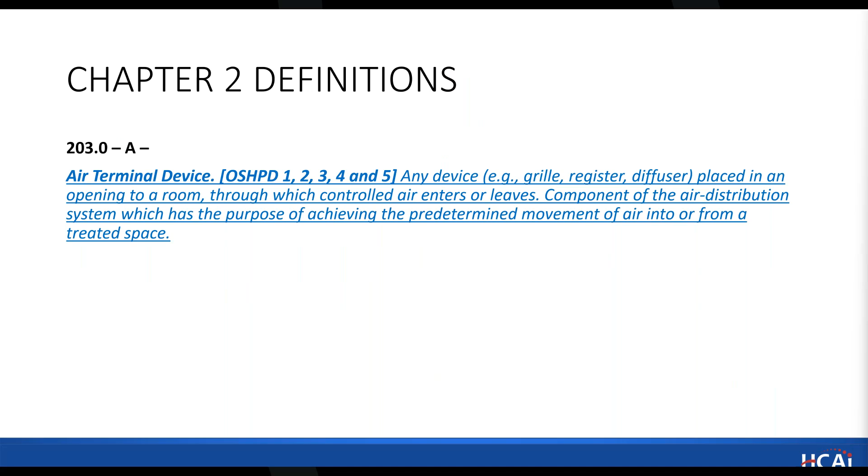Next up, moving to Chapter 3, under 321 for essential mechanical provisions. Our new section here is provided for 321.3, and it's for cooling equipment necessary to maintain temperature and humidity for one operating room and other spaces as identified in the functional program. This code section was coordinated with CDPH as we were evaluating NPC 5 requirements and emergency planning.

There's also a minor change to 321.6 for all control components. We also want to specify this is for fire and smoke dampers, as those normally shut down on loss of normal power. We need to keep those energized to keep the system operating during loss of normal power.

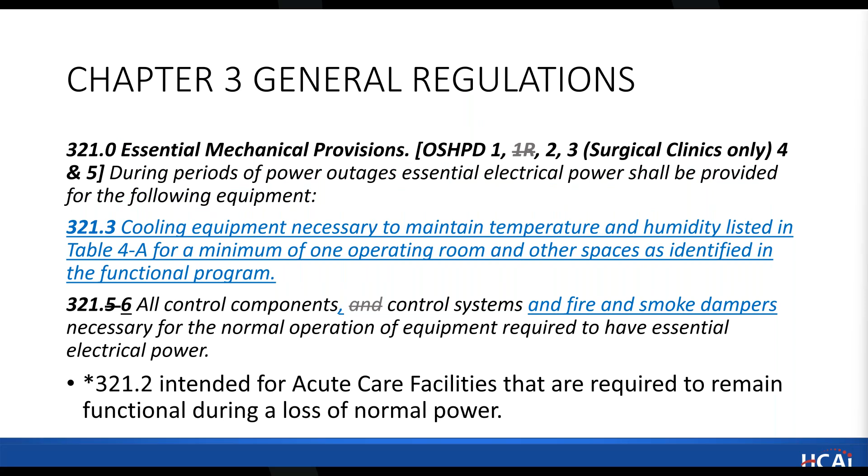Next up in Chapter 3, we have 322, sensitive areas or rooms. This list was updated to bring in some similar room types from 1224 for operating type rooms. The list was reorganized, and then also procedure room class 2 imaging was added.

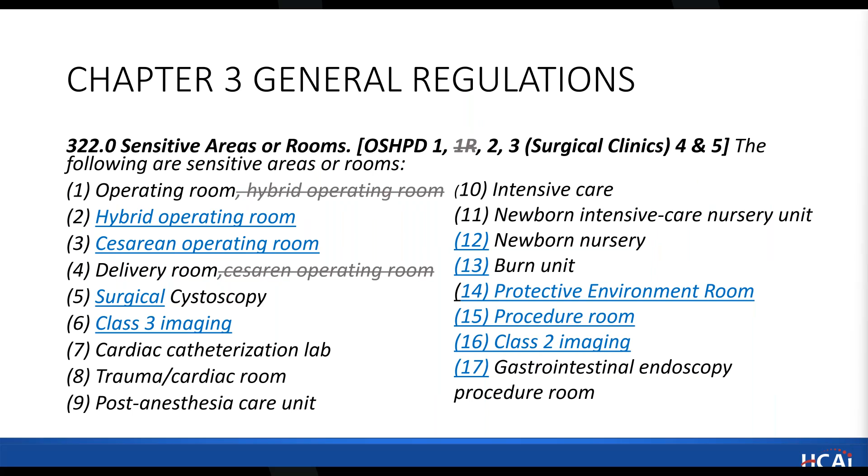Moving on to Chapter 4 for ventilation air. The OSHPD amendment for Table 4A was relocated from 402.1.2 to 402.1. OSHPD's trying to make sure that our amendments are in the middle of the model code, so there's a new paragraph there, and then the additional requirements for using ASHRAE 62.1 for non-Table 4A spaces were coordinated with this amendment.

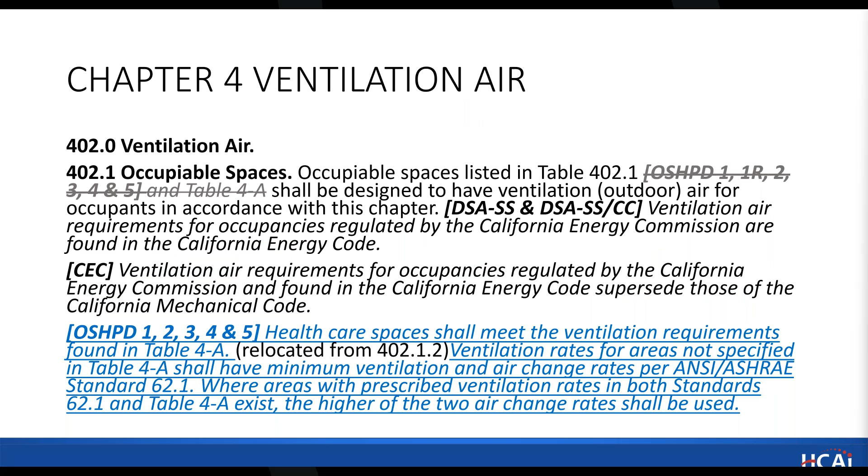So the next section here, 402.1.2, the Uniform Mechanical Code adopted the 2021 edition of ASHRAE 170. In the previous code cycles, the 2013 edition of ASHRAE 170 was adopted. So we're revising our amendments to coordinate with the 2021 edition. So the language in this paragraph was moved up to 402.1.

And some of the amendments following this were coordinated between the OSHPD Chapter 4 requirements and ASHRAE 170. The following line at the end was to note that where requirements of this code conflict with ASHRAE 170, the most restrictive requirement shall prevail. Some OSHPD requirements are a little bit different than ASHRAE requirements, so both standards need to be utilized together.

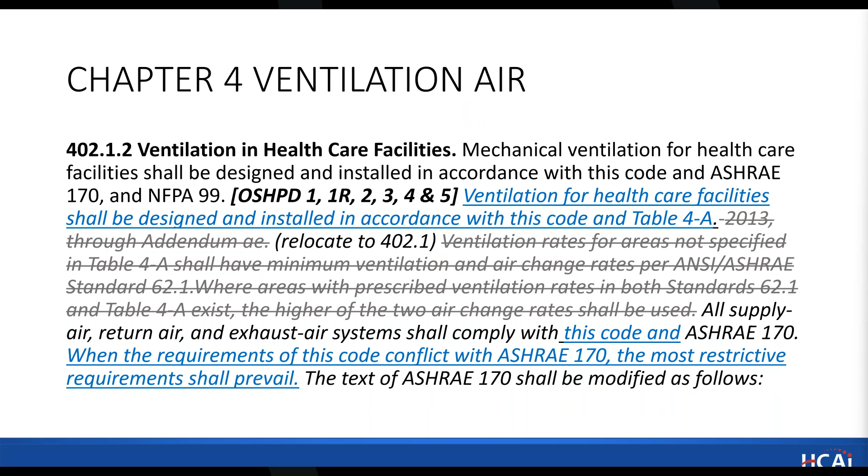Following on with the same section, some of the amendments to modify ASHRAE 170 adoption were changed. So the thing here was, instead of noting not adopting the specific ASHRAE 170 section, to provide a pointer to the OSHPD amendment in the section number to make it easier to compare the two. Also, similar to before, the ventilation tables are referenced with Table 4A in the California Mechanical Code.

Continuing on with some of these modifications in the same section, some of the items pertaining to airborne infection isolation and protected environment were noted. And then again, some additional references to the ventilation tables in Chapter 7, 8, 9 have been replaced with a reference to Table 4A.

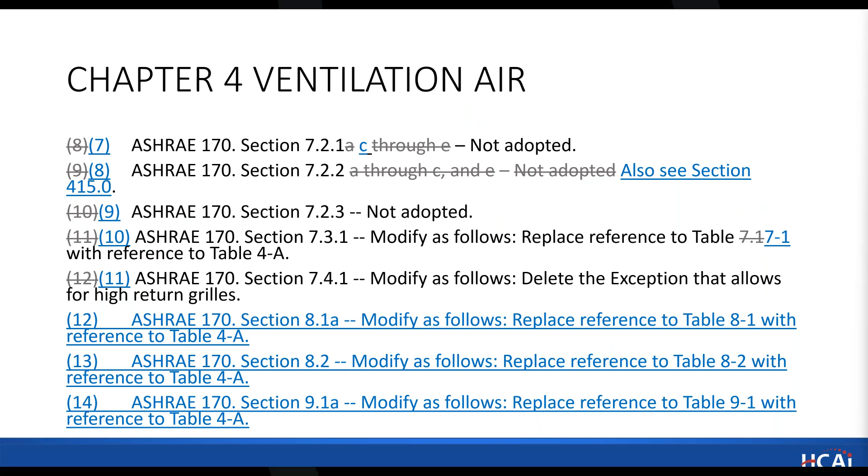Moving on to Section 406. This section just had a strike through, and just to point out, the provisions of the code that are removed have a gray font and a strike through here. The new changes are underlined with blue. So in this section, just the food preparation area was being removed from the section. Food preparation is included in Table 4A, and this is to coordinate with some of the filtration requirements in the national standard.

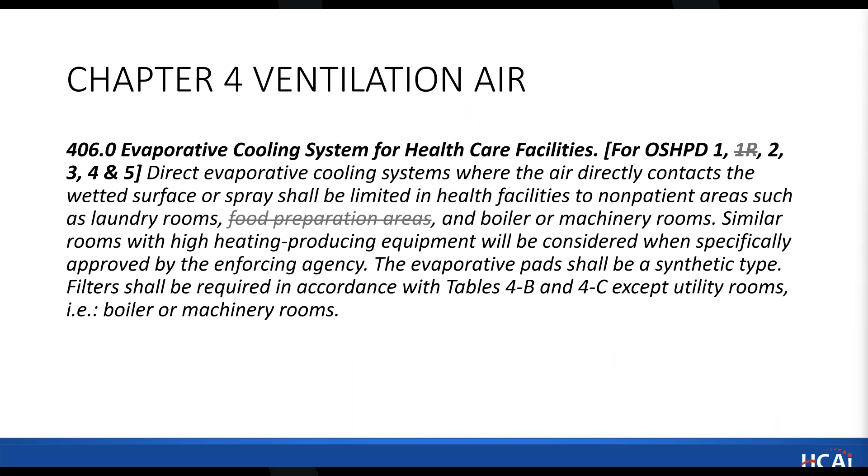Moving on to Section 407.1, the exception 2 provided all the unoccupied turndown requirements. Rather than have a long section with multiple requirements inside of the exception, these were moved to Section 407.7. So the new pointer here for the unoccupied turndown will point to 407.7.

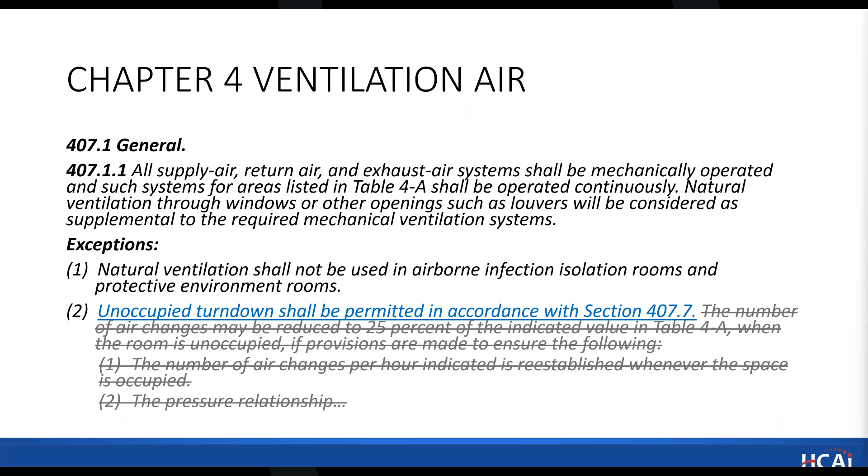So moving on to 407.2.2, the new section 407.2.2.1 is added to bring in the requirement for exhaust height discharge for specific spaces of infection control. And this is in accordance with the national standard. It'll have height and the distances from outdoor intakes and building openings. And these are the hazardous exhaust areas, including airborne infection, bronchoscopy, compounding, morgues, and similar type spaces.

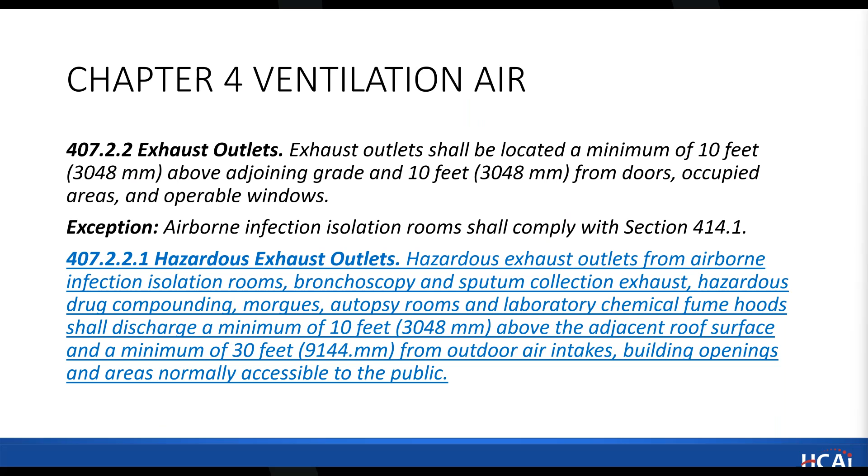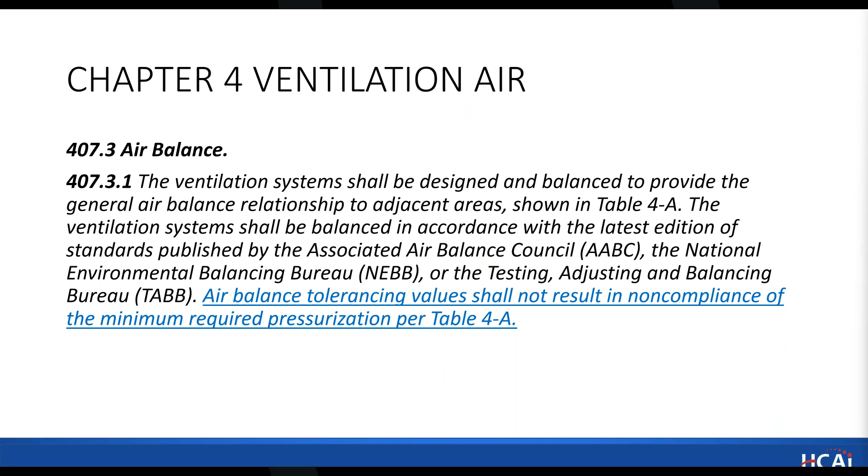Moving on to 407.3, air balance. A new sentence was added at the end to clarify airflow values must still provide the minimum required pressurization when balancing. Some air balance tolerances can be as high as 10%. For the airflow value within 10% and meeting the approved plans, the required pressure differentials must also be maintained. It's just to clarify that.

Moving on to Chapter 4, ventilation. We did a little bit of reorganizing with this section. Requirements from 420, which also dealt with air distribution devices, were brought into the section. 407.4.1.3, the new section, will take the 407.4.1.1 amendment, and we're going to split that up into multiple sections that deal with each requirement. And then in the reorganization, 407.4.1.2 is brought over from 407.4.1.6. So just a little bit better flow to get the general requirements, followed by the more room type specific requirements.

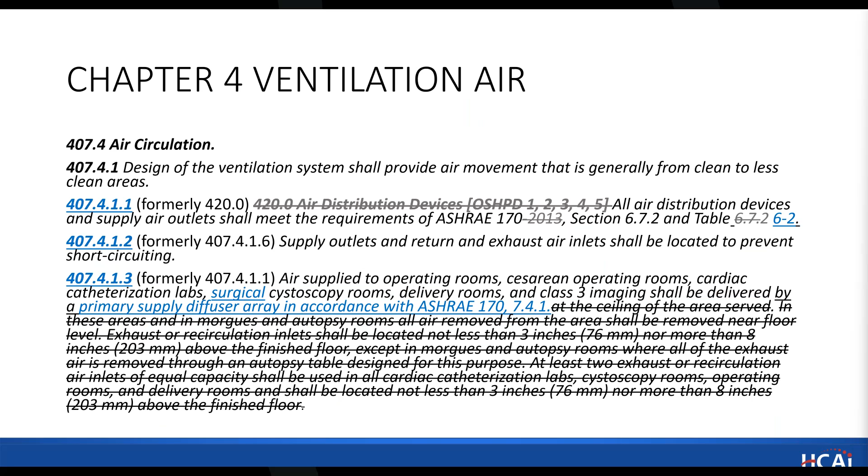So following that, 407.4.1.4 is a new section to provide directional airflow for Class 2 imaging and procedure rooms from clean to less clean. 407.4.1.5 will locate the return and exhaust inlet requirements for operating room type spaces. 407.4.1.6 will split out separately the morgue and autopsy occupancy requirements. So this just makes it read a little bit better so we can read one section for each specific requirement. And then 407.4.1.7 is the relocated 407.4.1.2 for position of low inlets.

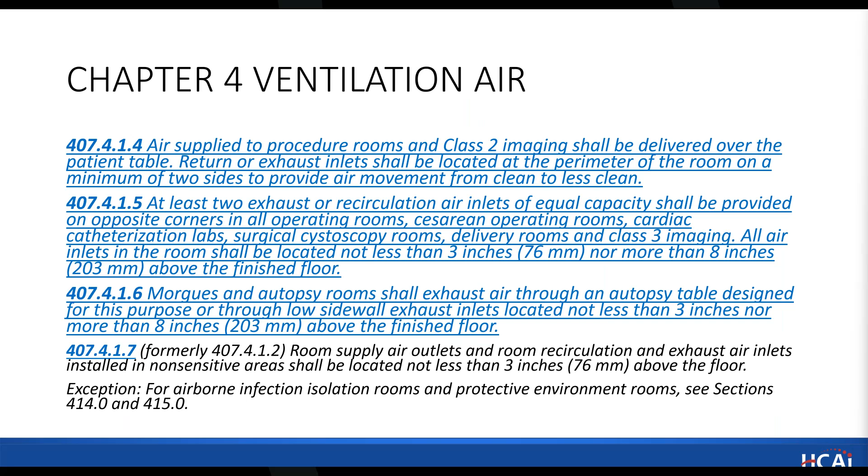With those changes, the corridor and the next sections were revised section numbers to 407.4.2, and the corridor requirement was revised to be more in line with the California Building Code. These OSHPD amendments went in place prior to the building code requirements for corridor airflows, and so this is being updated to match the multiple changes that have happened since then in the building code.

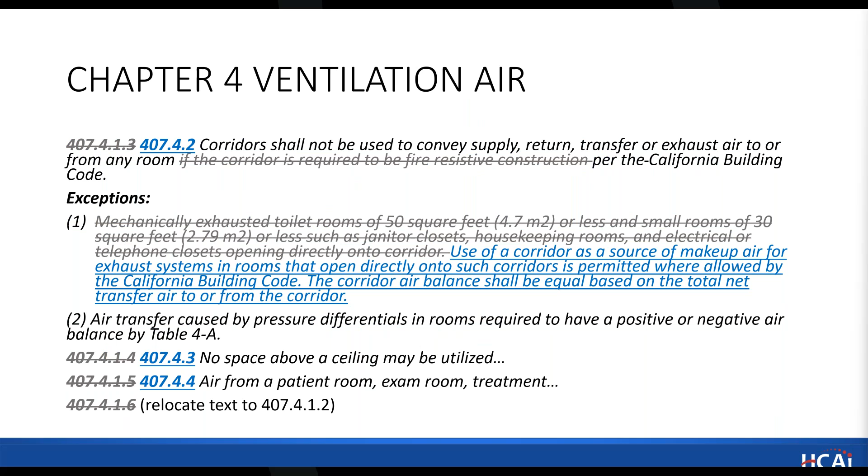Moving on to 407.4.5, this is renumbered from 407.4.1.7. This deals with what is now called recirculating room units. The charging statement's been revised, and item 3 is bringing in all the filter requirements rather than pointing to 408 and the multiple sections. Now all of the minimum MERV 8 filtration to match the national standards is provided for the specific room unit in this section, and that allows multiple other sections to be taken out of 408. So a little bit of a simplification here.

Number 4, specific for coils such as chilled beams. These systems need to be designed to have temperatures above the dew point and should include some sort of indication if that condition is not satisfied.

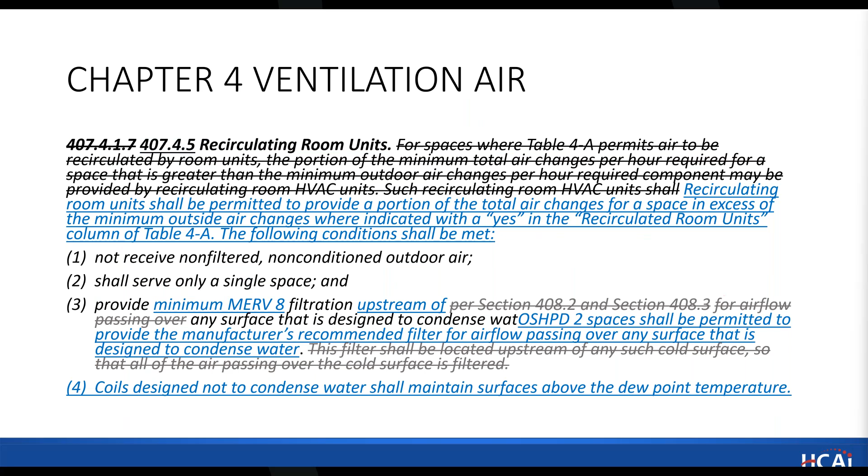So for 407.4.5.1, this section was added, bringing in the ASHRAE 170 requirement for recirculating room units, which only applies to spaces under ASHRAE 170 where OSHPD amendments apply to the building. So this section is necessary to handle non-Table 4A spaces, and they can just meet the 62.1 requirements, which we've outlined here, that the recirculating room unit may have filtration as recommended by the equipment manufacturer, and this will clarify spaces for IT rooms, mechanical spaces, or other non-Table 4A spaces.

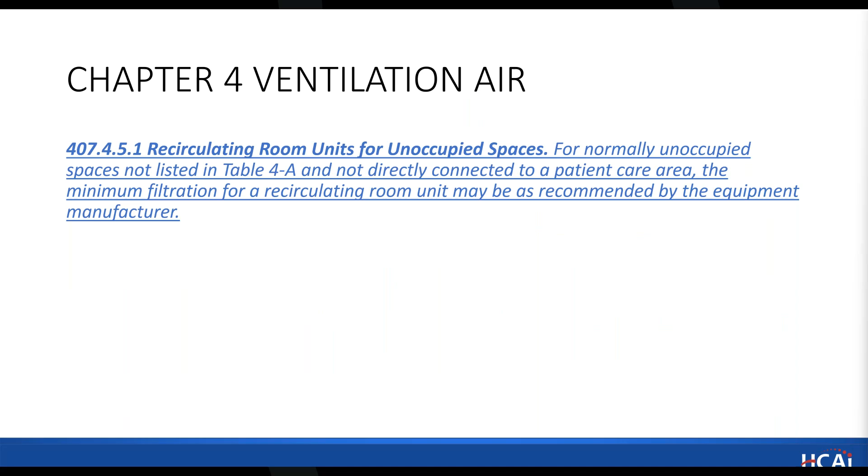Moving on, we had some changes to 407.5, and this is for variable air volume. 407.5.1.3 was revised for the purpose to maintain space pressurization. New section 407.5.1.4 was provided to complement the requirement in 407.5.1, since the spaces are not permitted to have VAV by the charging statement, and this is to help ensure that the return air to these spaces will maintain the air change rates and pressurization. Most of those spaces have pressure requirements, and the other sections will require supply and exhaust return control to maintain the space pressurization.

407.5.1.5 was added. National standards refer to ASHRAE 90.1 for return fan tracking. This provision is not included in Part 6, so some of the language that also takes into account space pressurization was added.

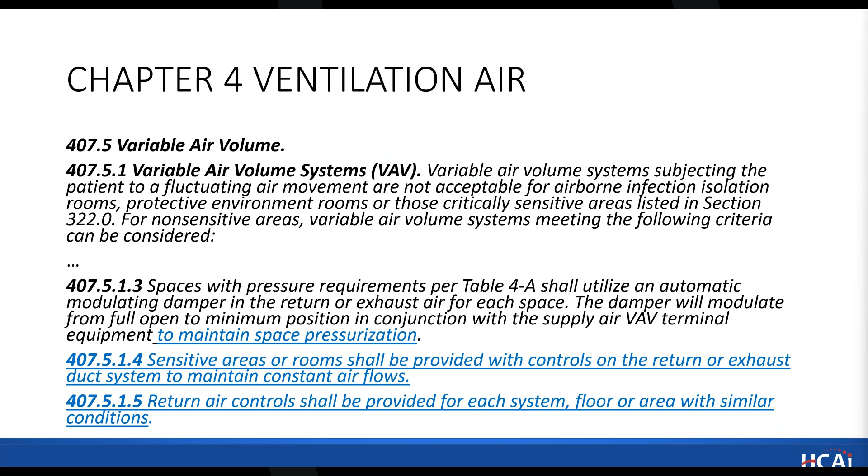So moving on to 407.7, this is the unoccupied turn down. So this was previously the exceptions in 407.1.1. We provided a charging statement and then 4 different criteria to split it out to make it easier to understand. So this is not a change or new requirement. This is the specific requirements in the existing paragraph, and just the section was revised in format.

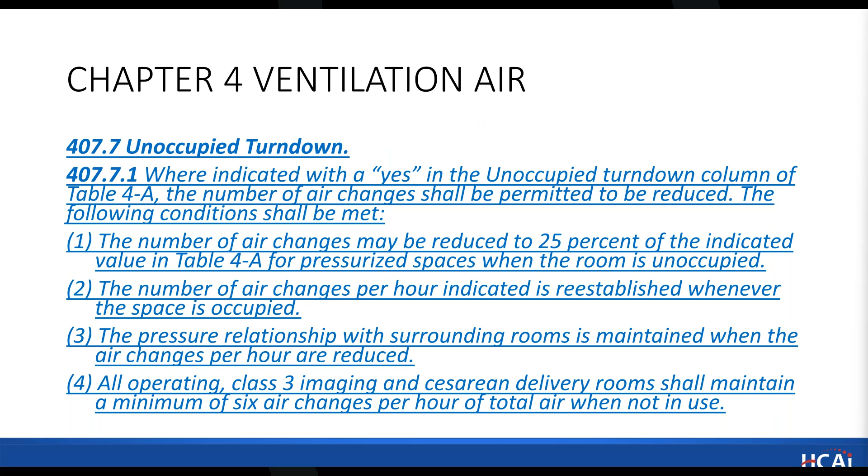407.8, building pressurization is a new section. This section is new to 2025 and brings in a requirement to prevent building infiltration, which is also in ASHRAE 170 2021 edition. And it also coordinates with section 407.5 and 407.7.

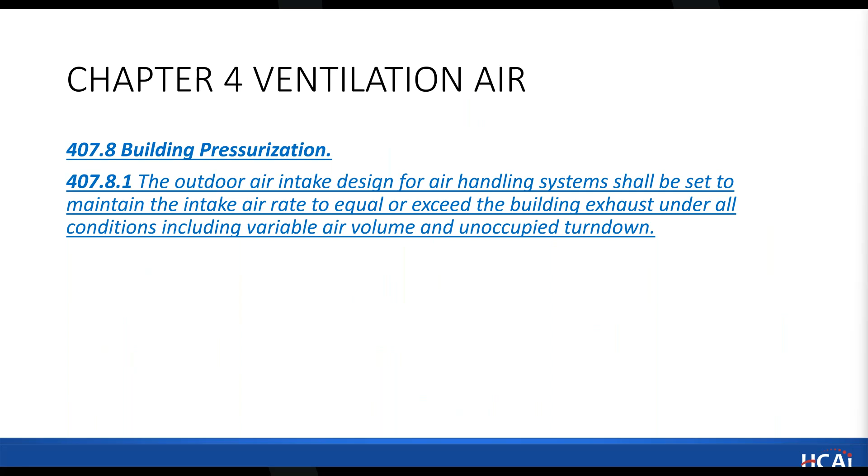Moving on, we're into section 408.1, which is for filtration. This section was revised to coordinate with requirements in ASHRAE 170 to provide HEPA filtration at the air terminal device. The air terminal device was also a new definition added previously in chapter 2. The previous organization of this chapter allowed a third filter bank at the air handler unit to do the HEPA filtration.

This section's been coordinated with the national standard requirements to provide that at the air terminal device of the room. So that'll be for operating rooms dealing with more sensitive critical surgeries and also protective environment rooms.

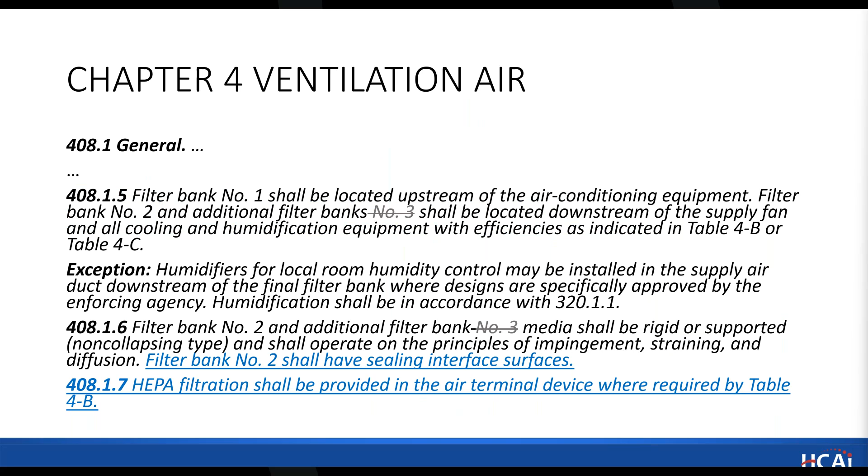408.2 is filters for hospitals. The 3 sections being removed were previously identified as non-central recirculating air handling systems, and these are now identified as recirculating room units and are addressed in 407.4.5. The filter requirements for this type of system is the same for all conditions. So whether or not the unit or the room function can use a recirculating room unit will be identified in Table 4A, and then we'll go to 407.4.5 for the requirements of the recirculating room unit.

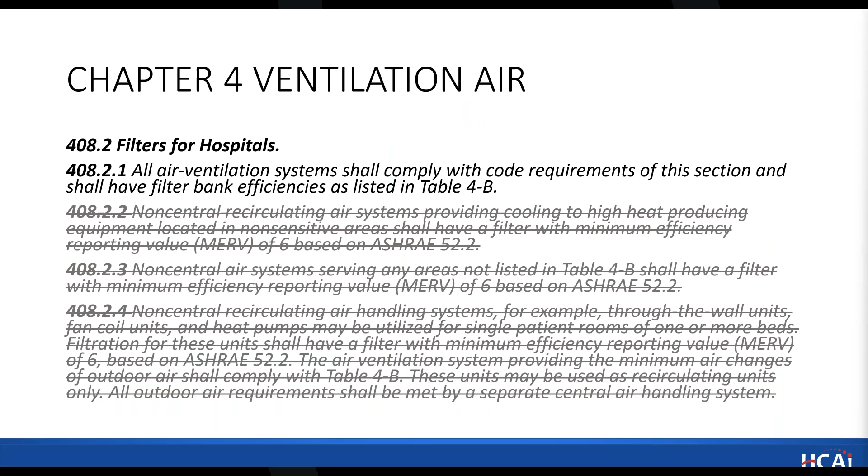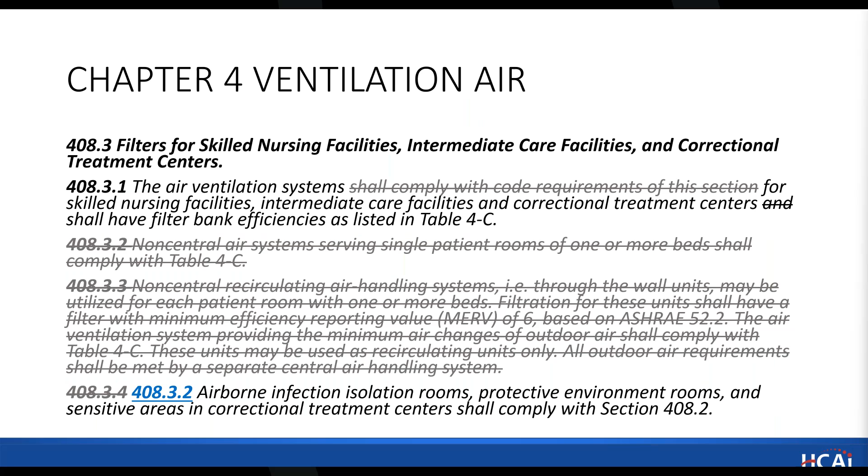Similar here, this is the SNF, skilled nursing facilities, intermediate care facilities, correctional treatment centers, filtration requirements. 408.3.2 and 408.3.3 were for the non-central recirculating air units, and this is taken care of by 407.4.5. 408.4 is the filters for outpatient facilities. Similar changes here.

And then 408.5 is just adding a pointer to also provide clarification that filters for recirculating room units will be provided per section 407.4.5. And also pointed out the note that where Table 4A does not permit recirculating by means of room units, as long as these units meet filtration per Table 4B, then they are permitted.

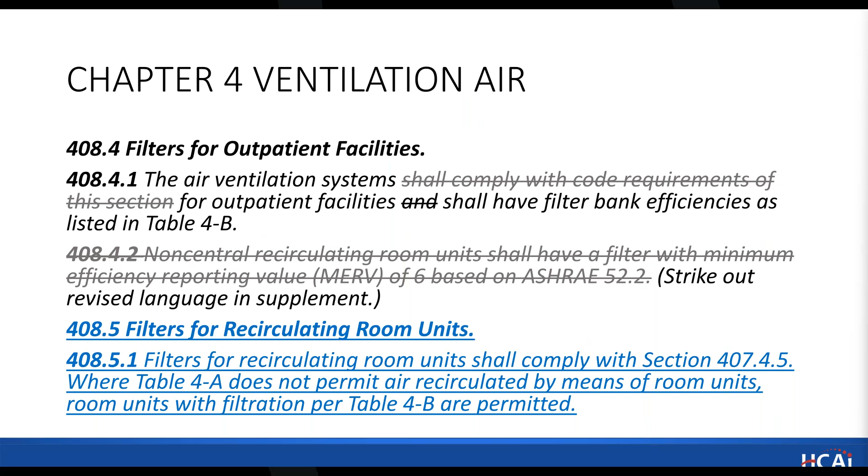Moving on to section 409, 409.3 is for insulation of ducts, was stricken in this code cycle. This is a duplicate amendment down in chapter 6, so 409.3 is removed, but it's not removed from the code. The chapter 6 amendment is still applicable, and this is a duct requirement, so it's more properly in chapter 6.

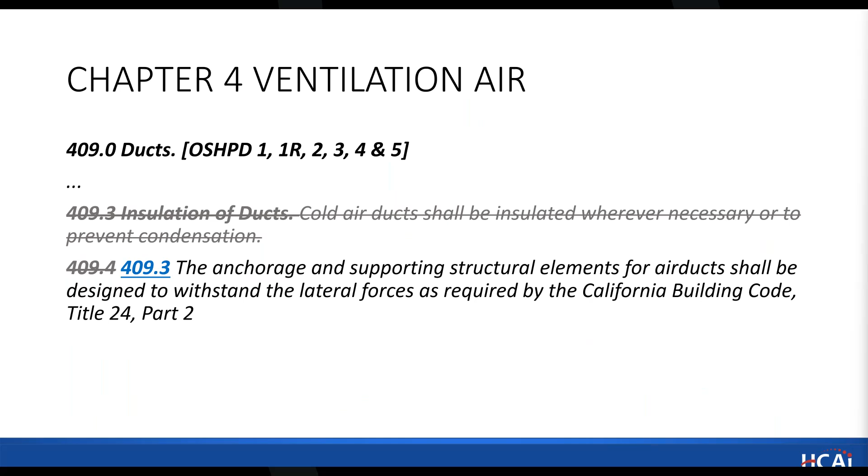Moving on to section 414 for airborne infection isolation rooms. 414.1.1, previously the height was 7 feet. National standard requires 10 feet, so we've updated the requirement to match the 2021 edition of ASHRAE 170.

And then 417.0 is the testing and balancing for those rooms. The last sentence is just to note that the air balance testing shall include a pressure test at the doors serving the isolation and protected environment rooms to provide the directional pressure relationships in section 416.1. And that's essentially to meet the alarm requirements that's being checked and tested.

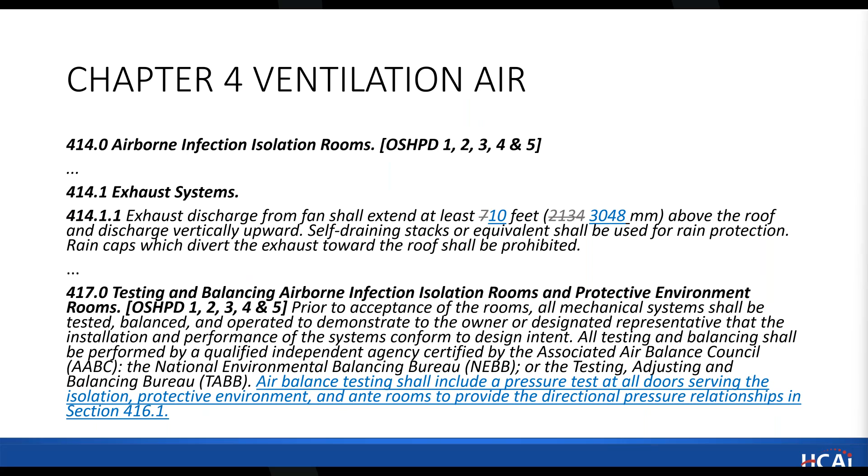Now moving on, so Table 4A, we show it stricken here, so we still have Table 4A. The existing Table 4A was... so rather than provide all the changes, there were multiple changes between the 2013 and 2021 editions. So rather than trying to incorporate all those changes, we started with a base.

Your audio cut out for just a second. Okay, thank you. So

Moving on next, the Table 4A here is shown. So as the table's shown in the code, this one's a little bit different. All the normal straight font is actually the ASHRAE 170 table items. All underlined and italicized font are OSHPD amendments to the table, and most of these amendments are brought from the previous code cycle. Typically how the code cycle works is all amendments previously in the mechanical code are brought forward with changes as needed. So we will go over the notable changes to be discussed today.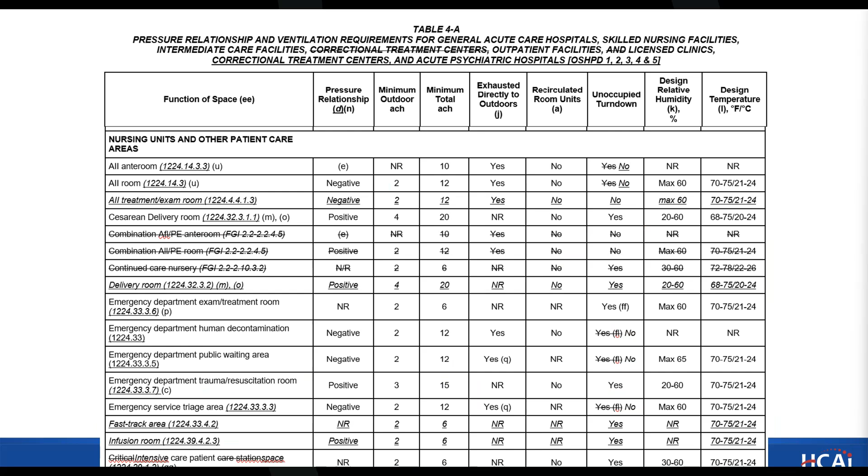So this is continuing with Table 4A. We'll have multiple slides here to show. This again shows either revised terminology to match 1224 and then existing OSHPD amendments from the previous Table 4A brought into the table or underlined.

Also, I want to point out at the top of the table, Table 4A, we added the OSHPD banner, the OSHPD 1, 2, 3, 4, and 5. That previously wasn't in the table. It's supposed to identify all OSHPD amendments. The title was reorganized to match the 1, 2, 3, 4, and 5 designation order. So that's why you see the change with correctional treatment centers and acute psychiatric.

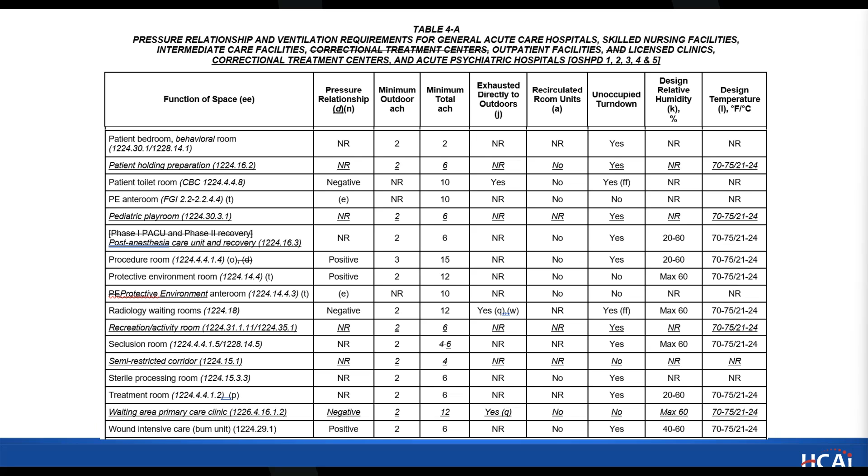We're still in nursing space. This is previous OSHPD amendments brought forward and room functions coordinated with the CBC terminology. And this section of Table 4A starts with diagnostic and treatment areas and follows the ASHRAE 170 format.

For the Class 1, 2, and 3 imaging room that was brought into the California Building Code the previous intervening cycle, some of the rooms based on CBC location and terminology were placed under the Class 1, 2, or 3 imaging. These spaces could be a higher terminology. Those procedures list is required whenever there's a Class 1, 2, or 3 imaging, and CDPH confirms the correct class. So a CT scan, if it was doing a Class 2 imaging, could have a higher ventilation and mechanical requirement based on the procedures.

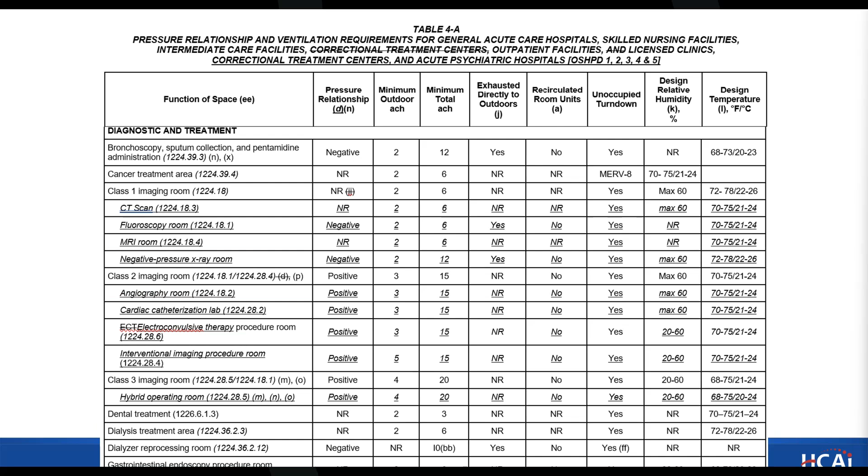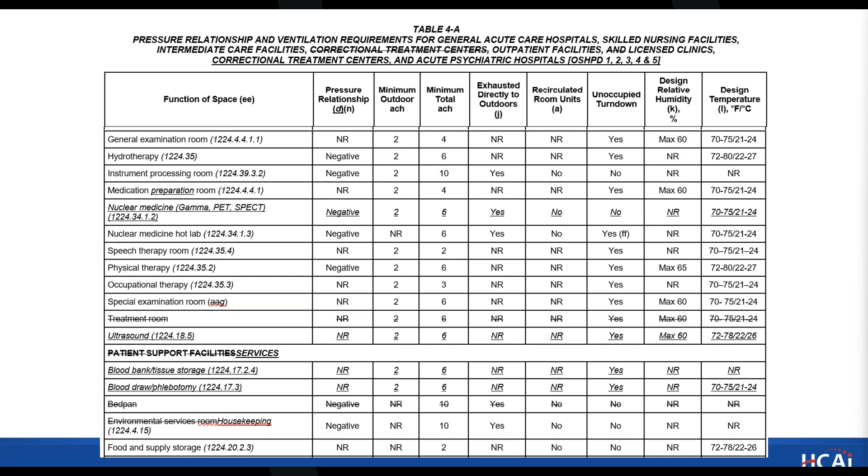And there is a printing error there for cancer treatment on the FAT, but that was fixed in proof phase, so the printed version will be corrected. This section continues with diagnostic and treatment spaces, and then it's followed by support spaces. Again, the terminology for these is shown as revised to more match the OSHPD amendments in sections 1224, 25, 26, and others in the California Building Code. Similarly, environmental services room is changed to housekeeping to match 1224.4.15 of the Building Code.

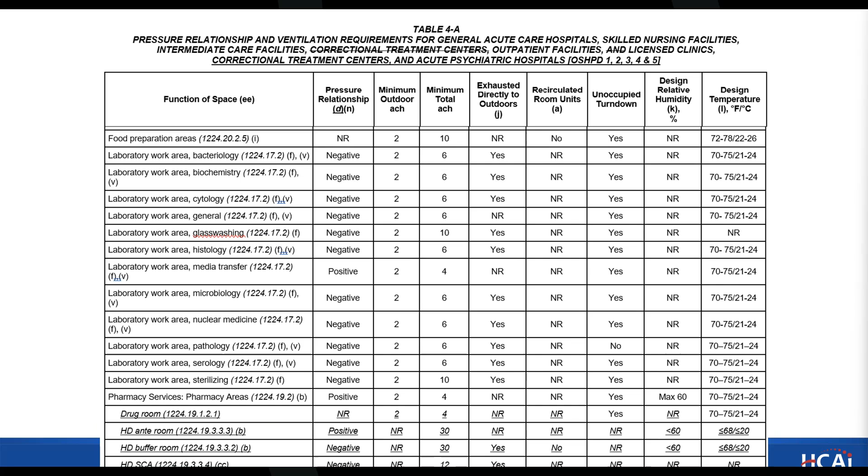We continue with more support spaces with the OSHPD amendments for pharmacy compounding added in there and brought forward to the table. Those are based on the USP requirements. Continuing with pharmacy compounding, there was one change to the non-HD anteroom air change rate. It was revised from 30 down to 20, and this is to match USP 797. An anteroom for non-HD is only required to be ISO 8, but if it does serve both a non-HD and an HD room, the HD anteroom requirements are more restrictive, required to be ISO 7, and still maintain the 30 air changes per hour required.

This table continues with a support service space for sterile processing. So we get our sterile processing ventilation requirements in one section, and then it's followed up by other general support services. The table continues with support areas for nursing units, and then is followed by the skilled nursing and intermediate care. So the OSHPD 2 type facilities will have a distinct section for those room types, including the resident type rooms. This slide continues with skilled nursing for service and support spaces for skilled nursing and intermediate care.

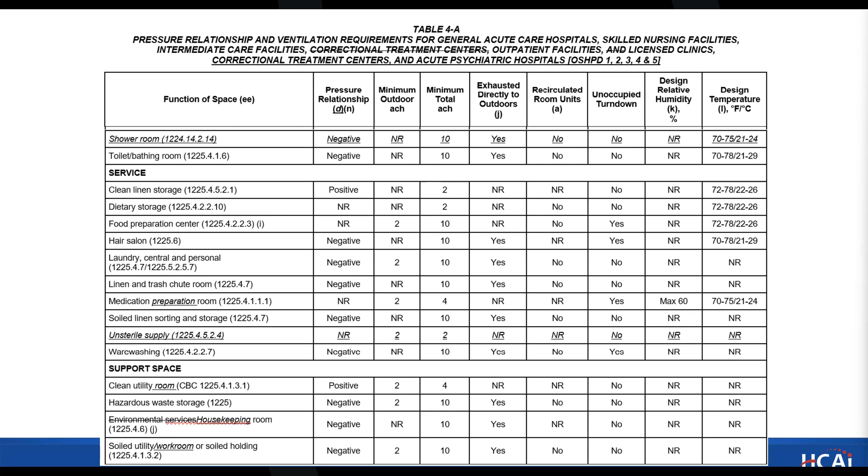So for the CMC Table 4A, the footnotes for the ventilation tables. We adopt ASHRAE Table 7.1 footnotes mostly and provided some amendments. The existing amendments that didn't have any changes are brought forward and not shown, but those are still provided in the table. We just address some of the changes that we did to the footnotes. So in footnote E, rather than reference the ASHRAE 170 sections, those have been replaced with mechanical code sections. Footnote G was just a relocation from a previous note AA to take up a not used space.

Note I was providing, since the mechanical code has commercial cooking areas, a pointer to Chapter 5 and the Section 511.3 requirements.

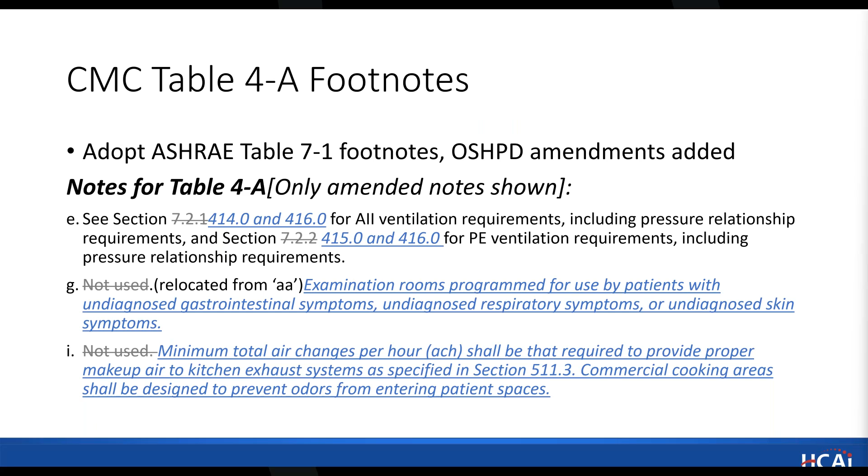So footnote J was revised to match with terminology in the CMC and as the tables are set up, and footnote EE here was revised to match with the terminology of the California Building Code, chapter 12, rather than the FGI callouts from the ASHRAE standard.

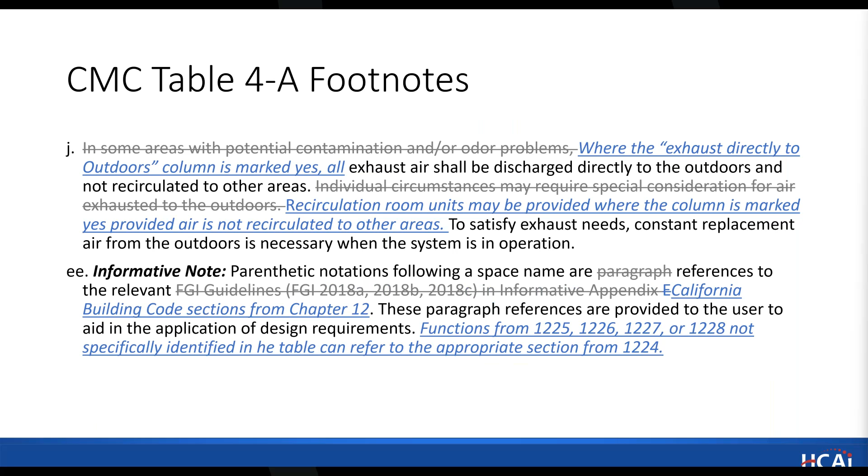Moving on to table 4B, starting off, so the OSHPD banner was also added to this table to identify the OSHPD categories or designations that it's for. And then similarly, the title was reorganized to match the order of 1, 3, and 5 designations.

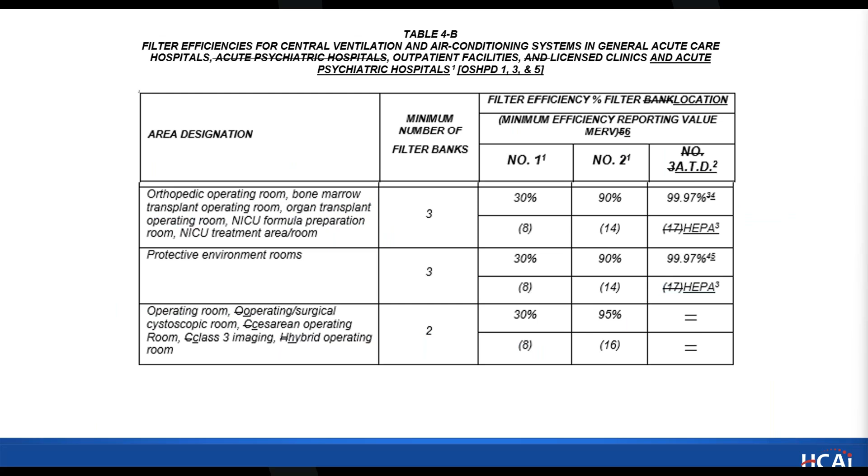Table 4B, we did have some updates for the 170-2021 edition of ASHRAE. And this is when the HEPA filter is required, it's in the air terminal device of the room served. So the orthopedic, bone marrow, organ transplant type operating rooms, when they require HEPA filtration, it'll be now at the ATD, which is designated as the air terminal device, rather than filter bank number 3. We also removed the MERV 17 as the MERV 17 doesn't quite meet the HEPA requirements, and HEPA is what is called out from the national standard.

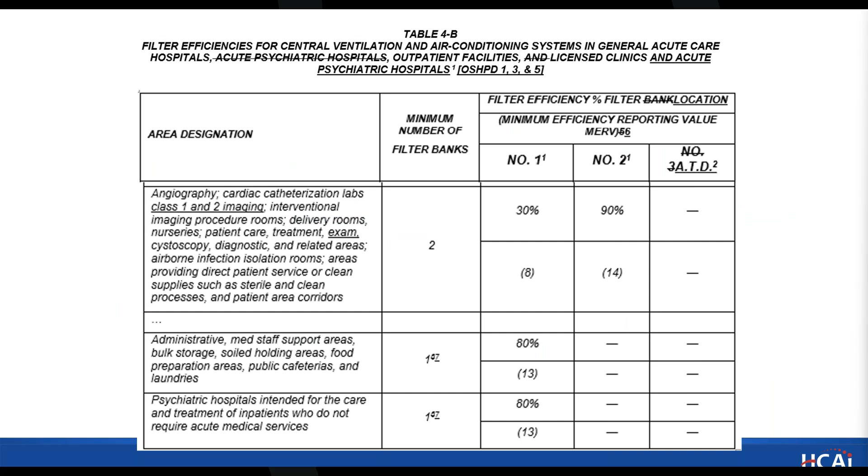Continuing with the table 4B, class 1 and 2 imaging and exam were added to the list for patient care areas. And then the footnotes were updated to match some of the requirements. So footnote 2 was repurposed to identify the acronym for the ATD, the air terminal device. Footnote 3 added the HEPA filter requirement found in 170, which is going to meet the IEST-RP test method.

Footnote 4 was revised to note the location for the air terminal device of the room served. And number 5 was bringing in the HEPA filter requirement for the air terminal device of protective environment rooms. However, it does provide a pointer to one of the exceptions in ASHRAE 170, section 7.2.2C.

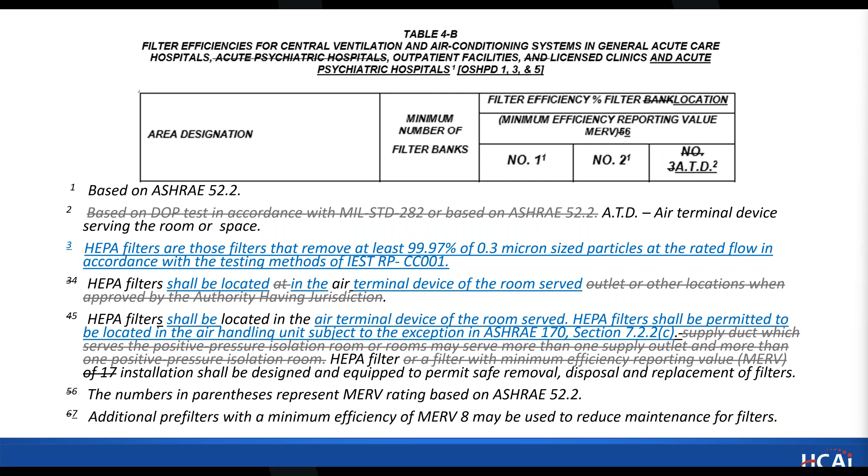Moving on to table 4C, the OSHPD banner was also added to this table for OSHPD 2 and 4. And footnote 2 was revised to coordinate with section 406 requirement and the national standard requirement for the minimum filtration for food prep area.

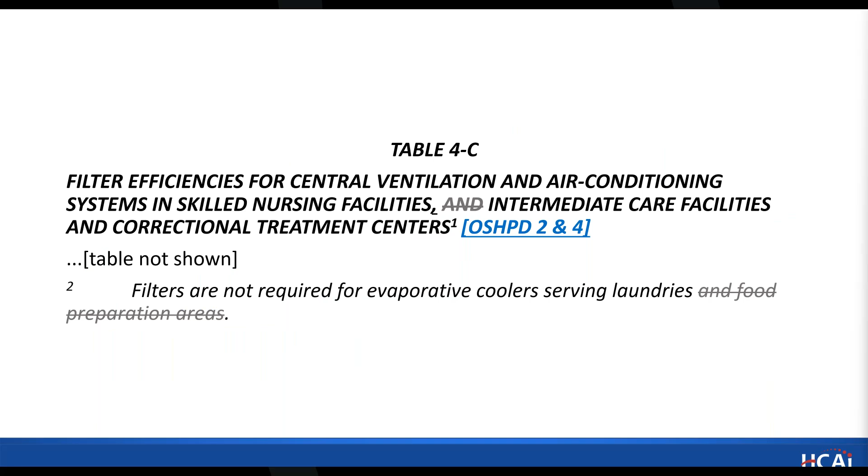Moving on to chapter 6 for duct systems. We still have some OSHPD 1R designations in the OSHPD banners. Just to refamiliarize, if you're not familiar, the 1R is for buildings that we're removing acute care service. So they'll essentially just be standard buildings under OSHPD jurisdiction that aren't able, due to earthquake standards, to hold acute care services. So those buildings will not have typical healthcare requirements. They could house a 2 or a 3 or potentially a 5, and if they do, the requirements will fall under those designations.

So moving on to section 603.4.1.1 for flexible ducts. There was one change to the flexible connector for our flexible duct for the volume mixing boxes for alignment, and that was reduced from 10 to 5 to match the model code requirement. For the terminal devices, it'll still be at the 10-foot length.

And then another sentence was added at the end of the section, just to provide a clarification and pointer to CBC 717.5.4, specifically for when dampers are omitted in the corridor. All the duct construction needs to be steel of not less than 0.019 inches in thickness. So this amendment doesn't override the building fire and life safety requirements.

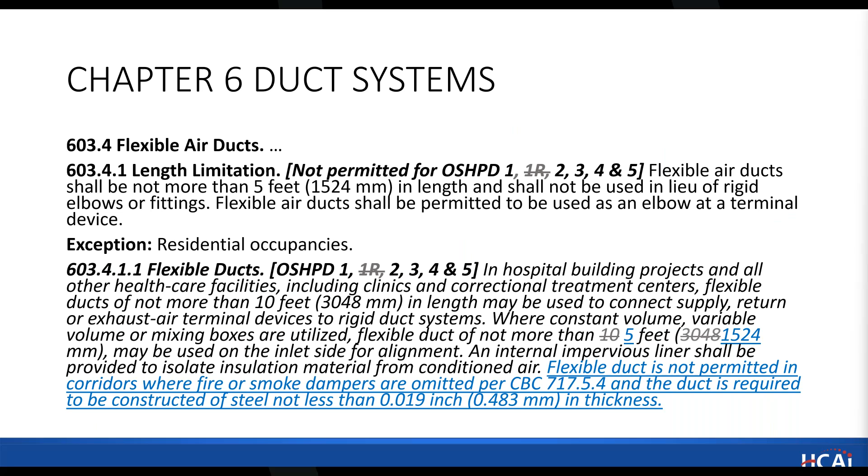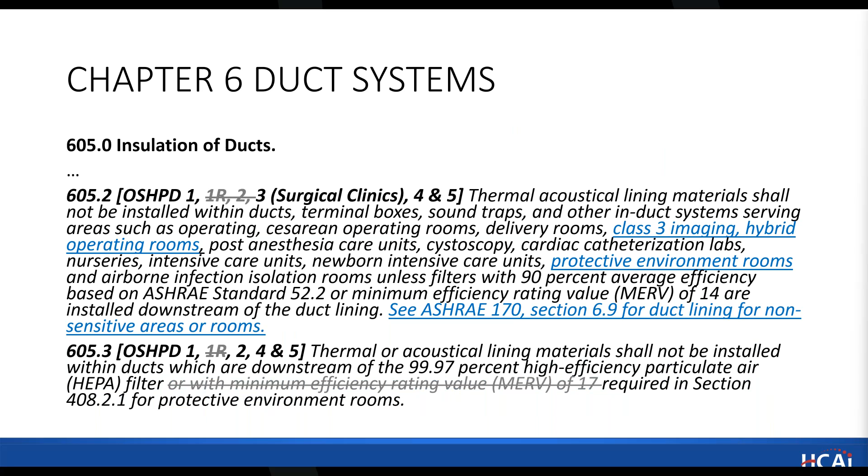Moving on to 605.2, this is just to add a couple of similar type rooms that are outlined in the CBC 1224 for the thermal acoustical lining requirements. And then to also provide a pointer to ASHRAE 170 for these non-sensitive areas for the general requirements for duct lining to be in accordance with section 6.9. And then 605.3, as the HEPA requirement is in place for those rooms, the MERV 17 was removed.

Moving on to chapter 11 for refrigeration, table 1104.1 was just being updated. In the intervening code cycle, the state fire marshal removed I-2.1 occupancies from the code, and this is a holdover. So this is being stricken as I-2.1 occupancies are no longer in the code. The ambulatory type healthcare, that'll be under a group B under special requirements in, I think, section 422 of the building code now. So they're a group B occupancy with all those requirements.

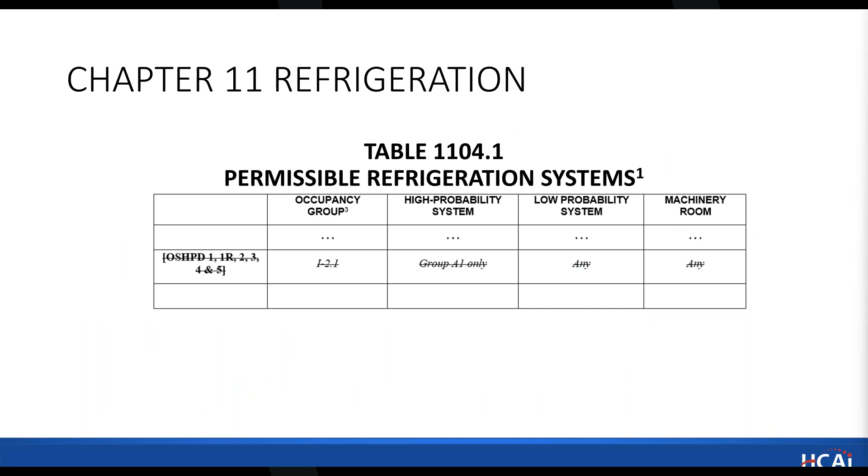So at this point, that concludes the part 4. I'll kind of look through the questions real quick to see if I can answer anything.

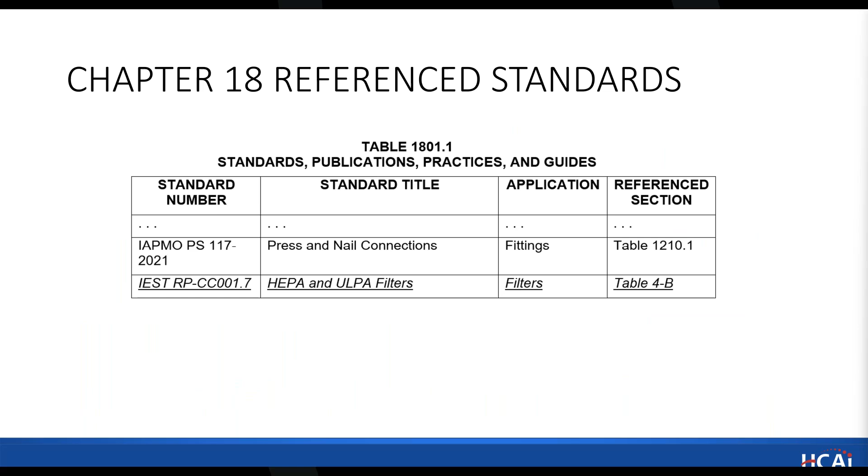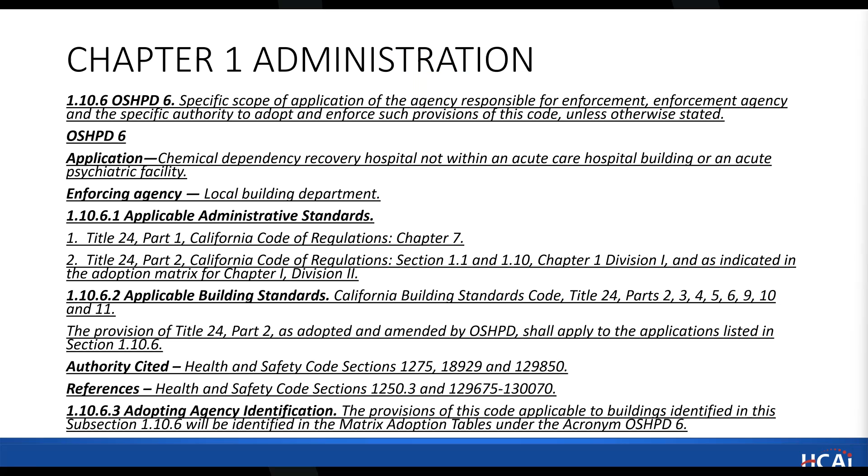So moving on, also covering today Part 5 California Plumbing Code Update. Chapter 1 Administration, this is similar to the Part 4. New Section 1.10.6 is added for OSHPD 6. Again, most of these requirements are going to fall under model code for these spaces. And 1229, the California Building Code provides functional room requirements for these types of units, and will address fixtures.

So moving on, Chapter 2 definitions. There was a couple changes to the definition for hand washing fixture under Section 210. Under faucets and trim, item C, the flow rate was addressed to align with ASHRAE 188 and Guideline 12 for flow rate of hand washing fixtures to be not less than 1 gallon per minute. And this is for required hand washing fixtures for infection control.

We do have under the table hand washing fixture for lavatories and restrooms. The public restrooms still have to comply with Title 20 for 0.5 GPM and those public types, as those are the only ones permitted to be sold in California. But for the other hand washing fixtures, for water delivery and limitation of Legionella, we're looking at 1 gallon per minute.

Item D, just a minor change to the tolerance on the 180-degree return. Some of the models on the market will have up to a 10-degree tolerance on the outlet position. So that was just to bring in to make sure we weren't excluding any specific models out there.

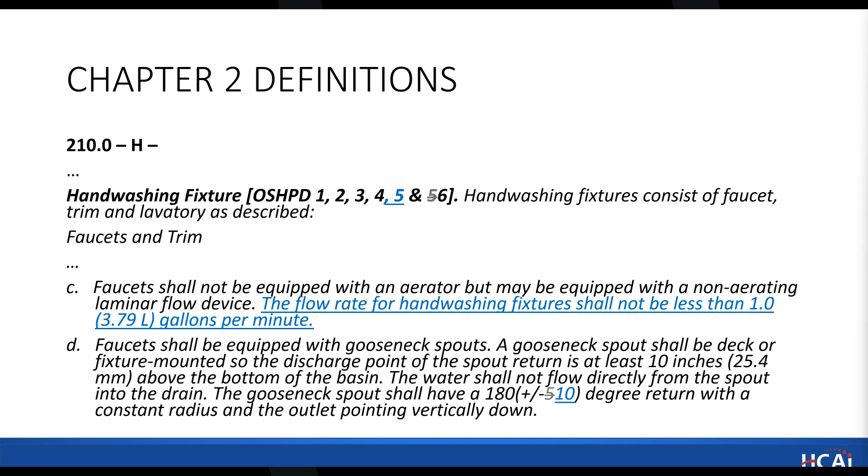Moving over to Section 221 is for scrub sinks. Previously, the code sent the requirements for controls to the hand washing fixture requirement in 210. So rather than send to a separate section, we revised this amendment to provide the scrub sink controls requirements in this definition. So upper extremities are not supposed to have any contact, so the foot, knee, or electronic sensor controls are what's required. And this aligns with Table 4.2 footnote requirements for scrub sinks.

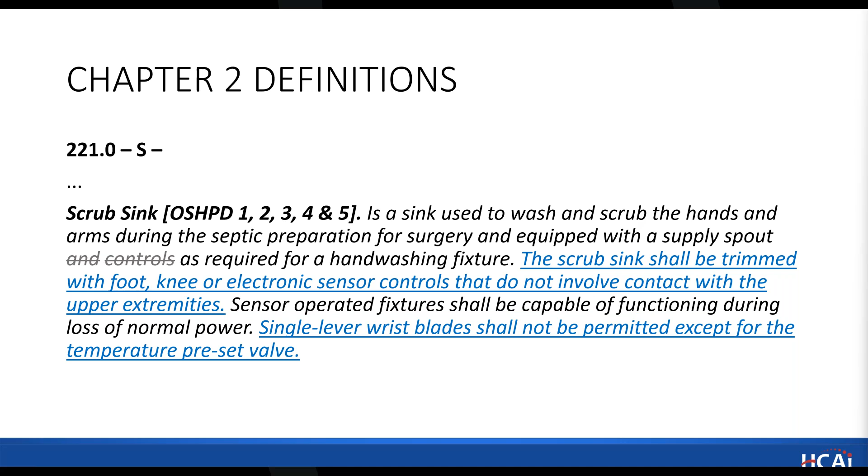Also added another item in accordance with the National Standard for FGI that a single lever wrist blade, those aren't permitted on the controls for activation, but they can be for the temperature preset valve, so they can adjust temperature prior to hand washing. Moving on to Section 310, these were just reorganized for model code changes. So the OSHPD amendments will have some new numbers.

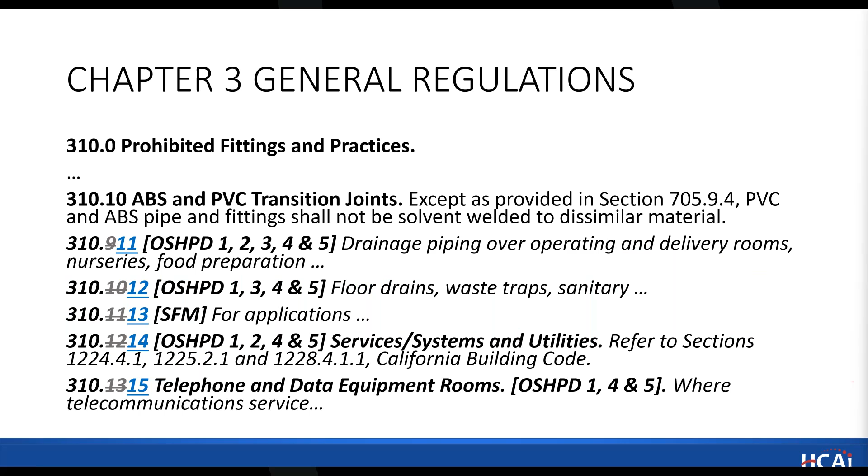Moving on to 319, previously this was not permitted for OSHPD, that's stricken as this is just a general requirement and points to Chapter 13. We do have amendments, and we've kind of reorganized how the matrix will show adoption of that chapter.

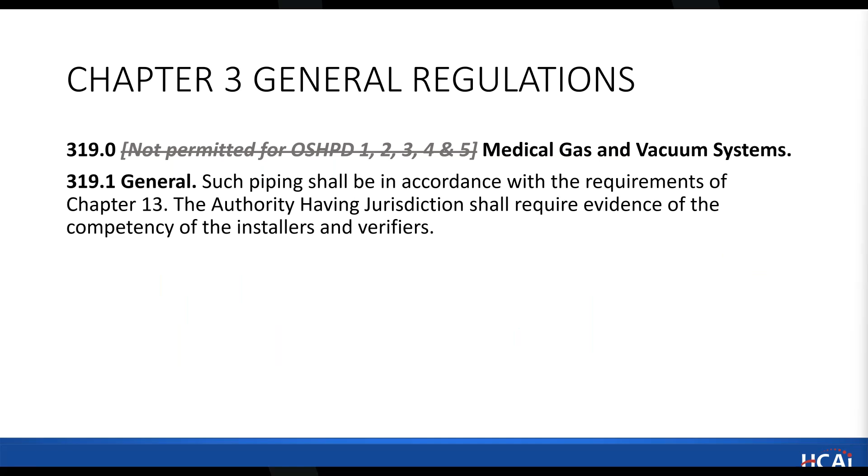Moving on to 422, we had a couple changes to 422.3 for fixtures. We did bring in the OSHPD banner for OSHPD 6 for this section. And the exceptions were modified. Now that there's numbers, we added a second exception. And specifically for small waiting rooms, for public waiting areas with an occupant load of 10 or less, just noting that one toilet facility is okay in line with model code for those types of spaces.

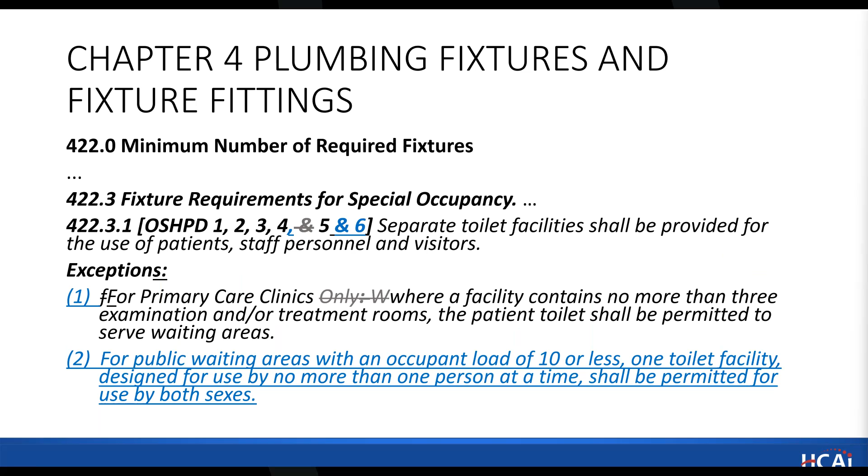However, it needs to be a single use and shall be permitted for use by both sexes. So typically these are labeled all gender per 1224 or the other building code sections. And this will help with small clinics or remote waiting areas where the previous table showed 1 and 1, one male, 1 female for all waiting areas, regardless of size.

Moving on to 604.0 for the potable water materials, the OSHPD exception. The exception has the banner, so we're removing the under authority of OSHPD statewide health planning development, as the state office is not intended to be in the amendments. And just noting that the amendment applies to the potable water applications of 604, just for the potable domestic water system, and doesn't get extrapolated to other systems.

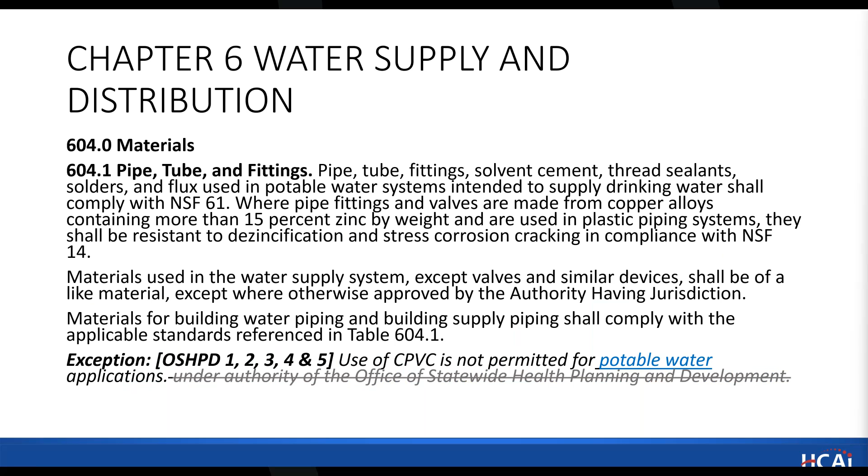Moving on to 609.10, this is for disinfection of potable water systems. A new item 5 was added. This coordinates with requirements in ASHRAE 188 and Guideline 12 and some of the other recommendations out there that there's a timeline for disinfection. So depending on the disinfection time frame with either occupancy, it'll require either additional flushing or potentially redisinfection of the system if it's too long, such as 4 weeks. And this is to prevent water age from water sitting in pipes as the construction waits for the final occupancy, so we don't get Legionella growth.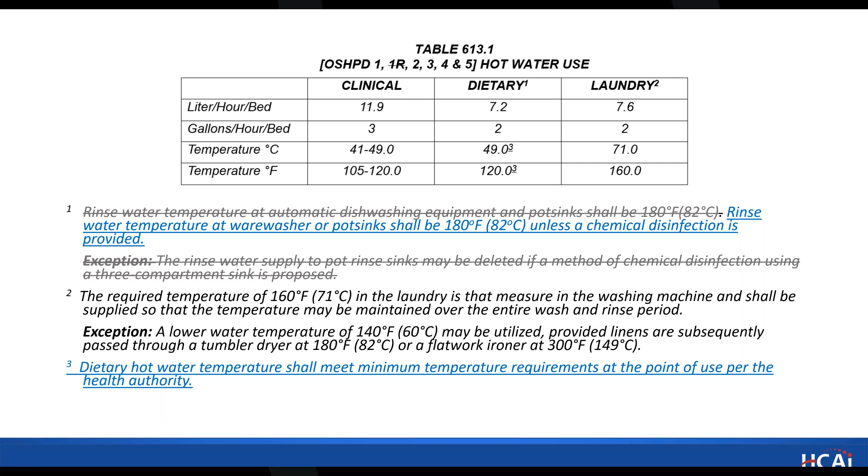And 3, dietary hot water temperature is to meet the minimum temperature requirements at the point of use per the health authority. So for dietary, we note 120. We typically do our water temperature requirements at the source. However, retail food code wants that delivered at the outlet. So that's to make sure that gets coordinated between the 2 code authority requirements.

Moving on to 613.2, a sentence was added for the hot water supply. So storage water heaters and hot water storage tanks shall be maintained at 140 or above. This is again to prevent Legionella growth, to get it out of the Legionella growth range, and coordinates with ASHRAE Guideline 12 and California Plumbing Code, Appendix N.

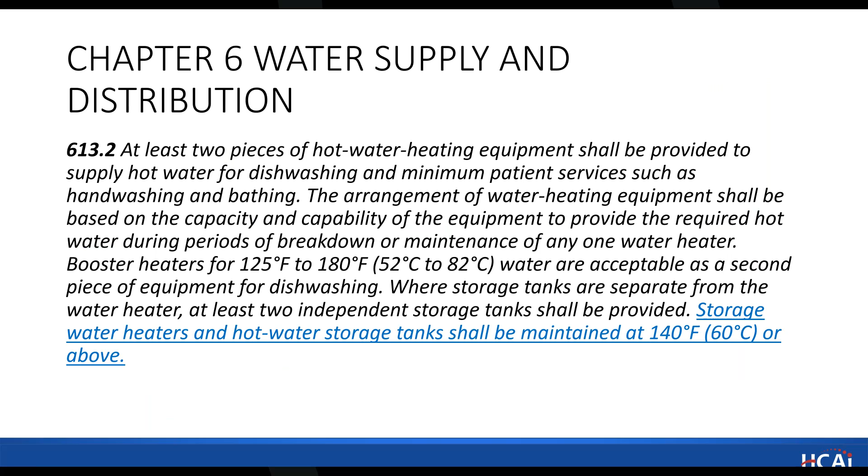Sticking with hot water requirements, 613.6, hot water distribution system. So our hot water requirements are based on FGI requirements for hospitals, and those were revised for the non-recirculated fixture branch piping; it was 25 and it dropped down to 10 feet. That's for matching the national standard. The first sentence there is also to make sure that the recirculation piping shall return the recirculation loop back through the hot water source. The temperature range is 120 to 105. 105 is in a heavy Legionella growth range. So again, trying to coordinate with the other standards to make sure we're preventing Legionella growth in these systems.

And similarly, 613.9, the hot water distribution shall include test ports and valve openings for flushing of portions of the systems. And this is supposed to be coordinated with design with the facility's water management program as defined in Appendix N. As far as the systems, we try to limit lengths and dead ends and provide recirculation, but water age can still be a problem. And testing needs to be coordinated with the facility and the licensing requirements, and any valve openings for flushing are needed to maintain that hot water system.

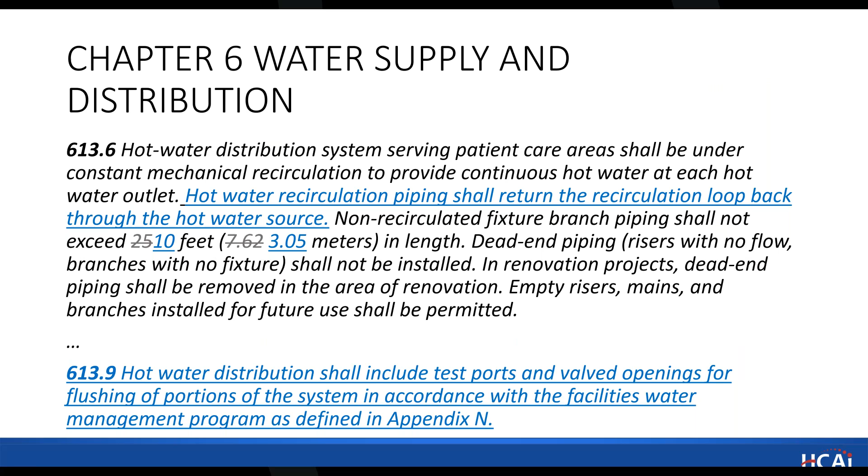So moving on to 614, this is for dialysis water distribution systems. We're moving the banner as an editorial to the start of 614.0 to note for OSHPD 1, 2, 3, 4, and 5. CPVC was added. We're updating the standard, which was previously RD62, and is now in the 23500 series. So the RD62 was changed to 23500-2 from AAMI. That's the ANSI AAMI ISO standard.

And then 614.7, we're recording this requirement. Again, we pointed to RD62, which is no longer being carried forward, and are pointing to the AAMI 23500-2 and -3 standards for dialysis for the water treatment.

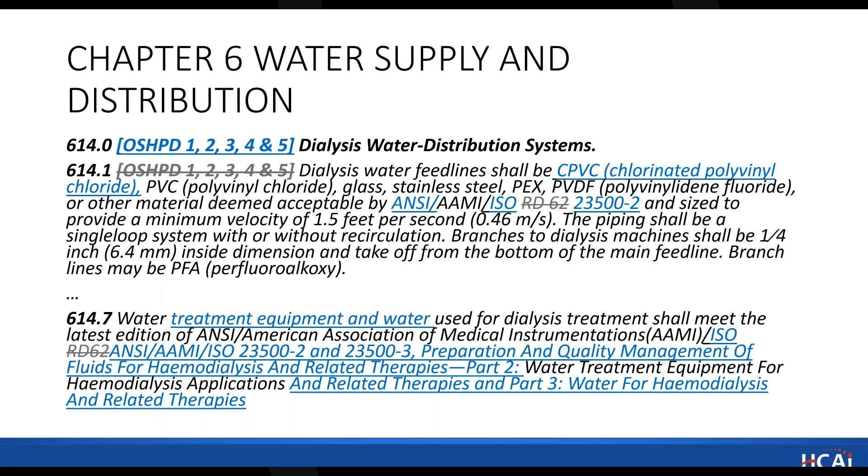Moving on to 615, our emergency water supply requirements are under 615.4. However, the existing section is identification of potable and non-potable water lines. We're just going to move that to 616 to make sure that's its own separate section. So these are just changes of section numbers. There is one change here. SPC 4D was added to coordinate with the structural requirements and the admin and building codes.

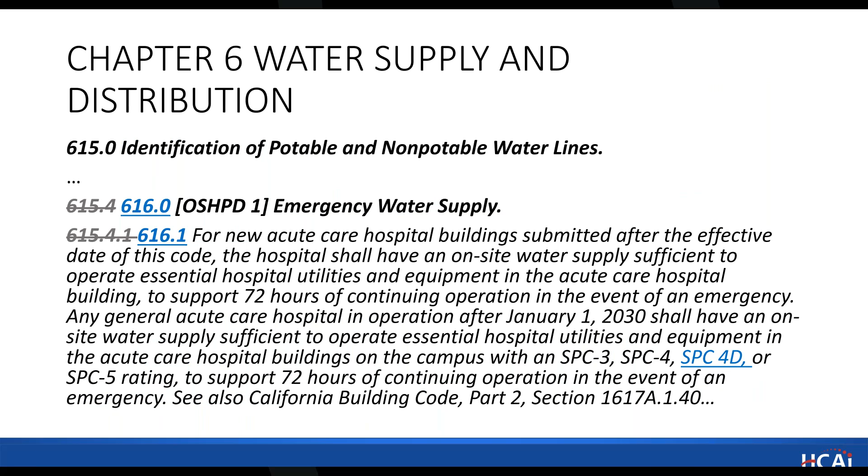And then 616.2 is also a revised code section. We did add a 616.3 for storage tanks. Generally, holding large amounts of water in tanks on site is not recommended just due to water quality issues. However, it is needed for emergency procedures. So the NPC 5 requires the on-site water supply, and this section is to help identify some of the water quality requirements to help provide a clean water supply.

So tank connections and circulation need to be designed to prevent stagnation and temperature stratification, and possibly supplemental disinfection is needed where the public water supply disinfection levels are not adequate to maintain that. And again, this needs to be worked with the facility's water management program and needs to be brought into the design stage when these tanks are being put in.

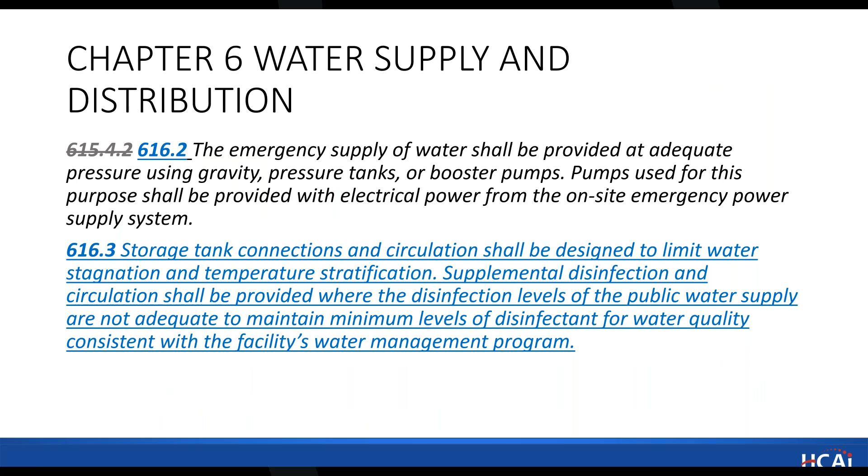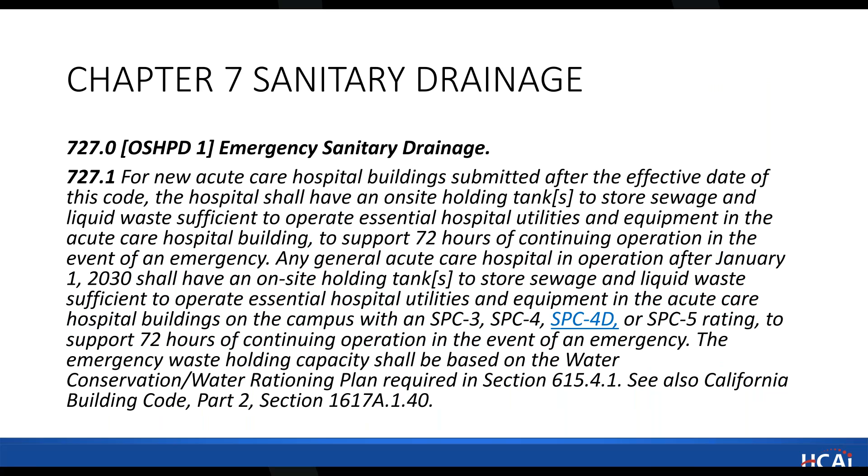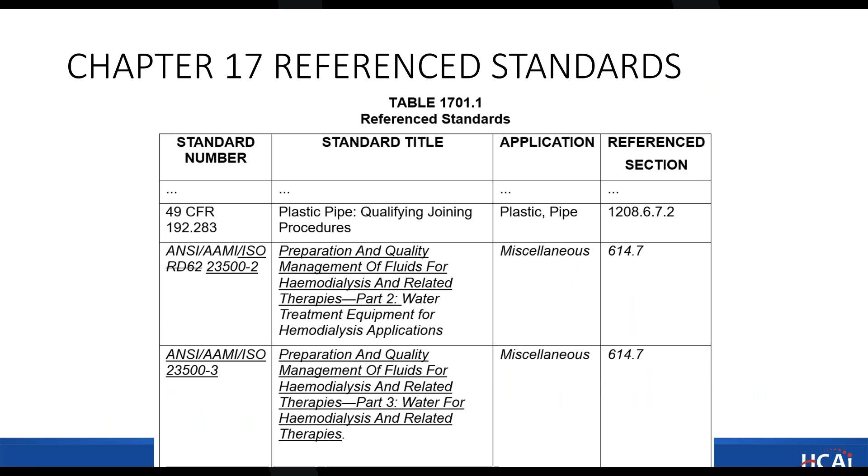Chapter 7, section 727 is for emergency sanitary drainage. This is similar to the water requirements: SPC 4D is a new SPC category and is being added to this section. So moving on to chapter 17, this is the reference standards. So we're replacing the RD62 with the AAMI 23500-2 and -3 standards in chapter 17. And that concludes the part 5 changes.

Summer, are you online? Did you want to go over the contact, or did you want to go through any of the questions or answer them later? Yeah, go ahead and give the information for the contact, and I'll start looking through the questions, see what I can answer. Okay. Sounds good, thank you.